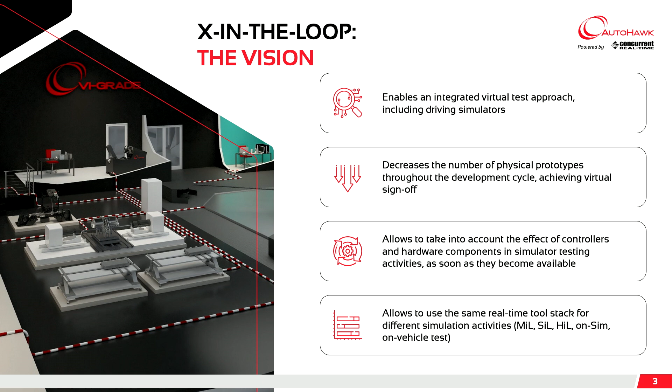To do that, what we adopt in the automotive world, and are now transferring to the motorcycle, is the AutoHawk. AutoHawk is a real-time platform based on hardware and software. On the hardware side and the control part, it is based on Concurrent Real-Time, our sister company. It consists of a real-time system with a huge set of I/O boards to enable communication with the real physical ECUs or emulation of some components, even sensors.

It's a Linux-based platform, and also a flexible platform open to third-party software and applications, and possible to link to third-party ecosystems. There are three main application areas in motorcycle development. One is the chassis. Everybody is familiar with VI-grade's VI-BikeRealTime as software for motorcycle dynamics on the chassis. In that case, on the hardware-in-the-loop side, we see applications on dampers, brakes and controllers.

Then ADAS and UX/UI: radars are becoming standard for high-level premium motorcycles, but also cameras. Some companies have already patented stereo cameras applied on motorcycles. Communication between vehicles, motorcycle to cars, for ADAS applications, and also HMI is an extremely important topic because it's the interface between the driver, the road, and the ADAS equipment.

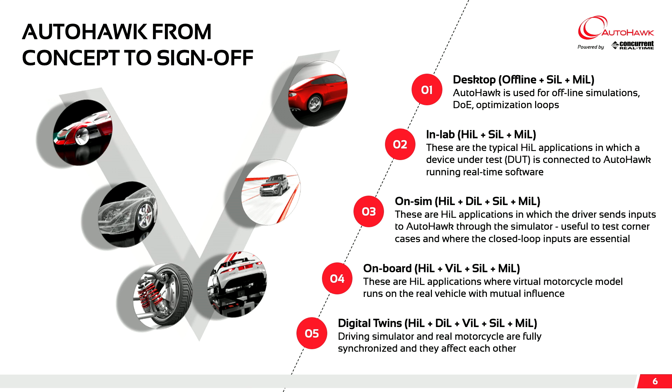And powertrain, with all its shades: traditional internal combustion engines, but also electric powertrains and battery electric vehicles. AutoHawk as a platform accompanies the customer along the complete V-cycle, starting from offline simulation, to real time, where only model in the loop or software in the loop are available, to in-lab with the HiL system integrated with the first prototype ECUs or open ECUs, where you can run the software on physical ECUs, connected with physical test rigs with physical components, controller-based or not, where you can put your controller in a Simulink model.

We started to think also about onboard solutions, as we did last year, and we launched last year the AutoHawk onboard for automotive application. There's also something ongoing for the onboard solution. And then finally the digital twin, where you have the complete digitalization of your vehicle, and you can perform a lot of tests in parallel with the physical prototype.

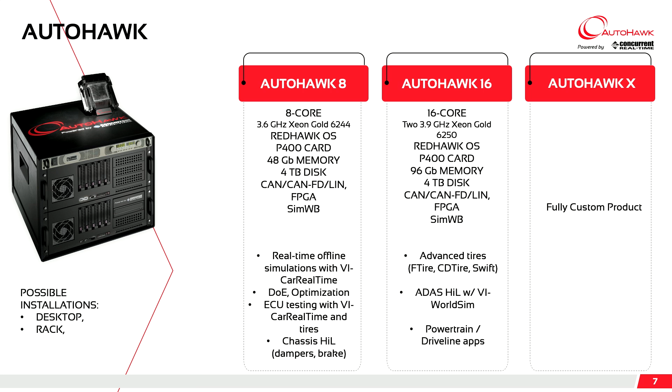The enabler, the hardware side: we have for motorcycle application 2 main standard configurations of real-time platform, an 8-core system and a 16-core system. For automotive application, we go up to 64 cores, but we think that, also to keep the investment low, the best compromise will be to play with those 2 systems, with the possibility to expand with the expansion chassis. If you have multiple I/O board requirements, the system comes already with several PCI Express slots available, but you can expand with the expansion chassis. And then AutoHawk X is a fully custom solution.

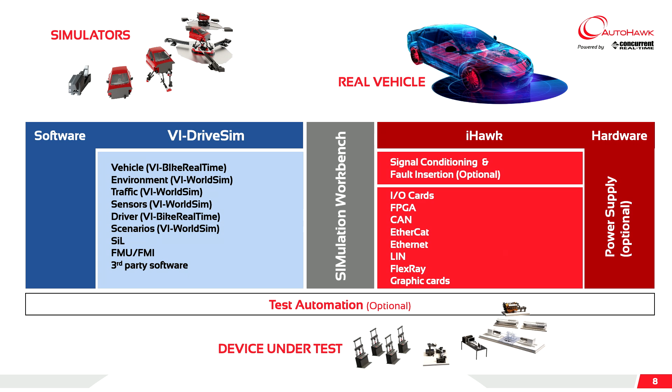The ecosystem is formed by hardware, the red part, where there is the real-time system and the I/O boards. The I/O boards are predefined I/O boards like CAN, CAN-FD, LIN, but there can be programmable I/O boards like a programmable FPGA, together with different types of protocols. We are working on automotive Ethernet as well, that will become standard in the motorcycle environment. Then the simulation workbench is a middle layer used to convey all the inputs and outputs during the simulation. And then the ecosystem of software from VI-grade with DriveSim for managing riding simulators and VI-BikeRealTime.

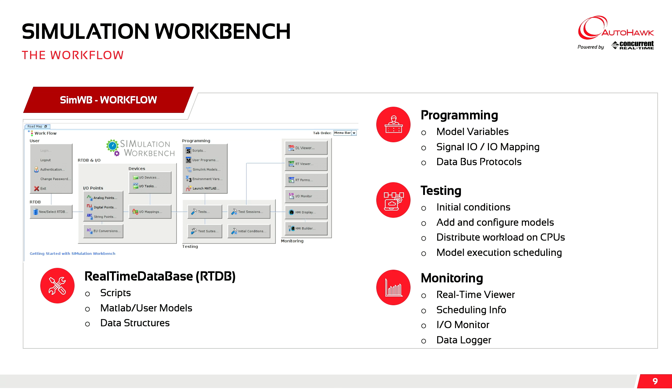Simulation workbench is a platform made by Concurrent real-time based on the AutoHawk hardware installed on the Linux system. You can manage the real-time database, the programming, the testing, and the monitoring during the execution of the test. This is the main connection point with external devices like dSPACE equipment, NI, Vector, and so on. The VI-grade ecosystem instead covers a larger variety of compatibility with third-party software, even third-party vehicle dynamics software or graphics. What is important is that all runs on the real-time system, and they are always compatible from the early beginning to the end.

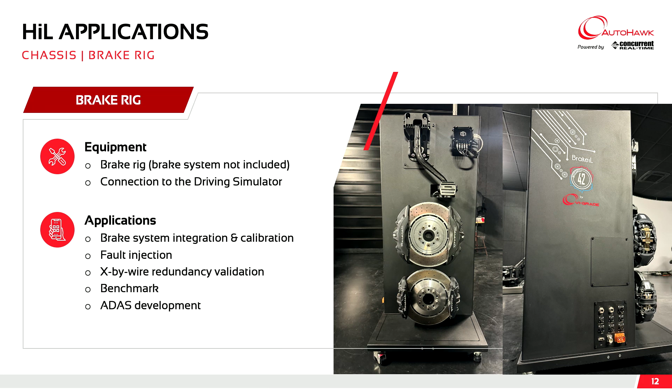Now, the theory is fine. Let's go to some practice, some use cases about what we consider hardware in the loop. For us, it's a control system or mechanical test rigs connected to driving simulators. From the chassis, we have brake rig systems that are controllable from a HiL station, a real-time simulation station, or from a riding simulator. The main applications are, of course, the analysis of the brake system. We are talking about full wet brake systems with the correct length of the system, the correct calipers, and the correct ECUs mounted and implementing the control system.

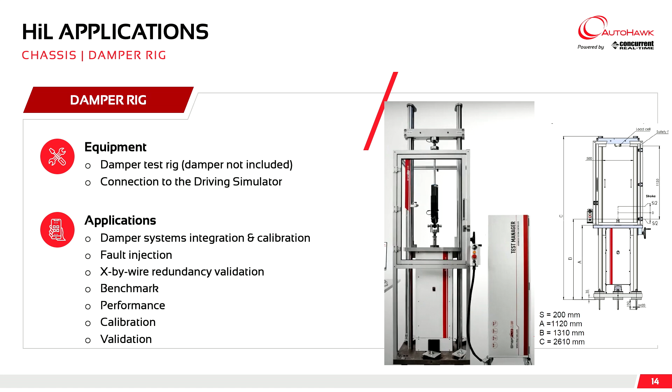They can be also brake by wire. If it's connected to a riding simulator, there can be also analysis of the driver feeling, the brake feedback. Connected also to the control units of the ADAS, there can be the interconnection of all those control systems. Damper rig: all these systems are derived from automotive application. There will be the possibility soon after lunch to see some of those demos in the demo area. I don't want to spoil more, but there will be the occasion to see some of them functioning in the afternoon.

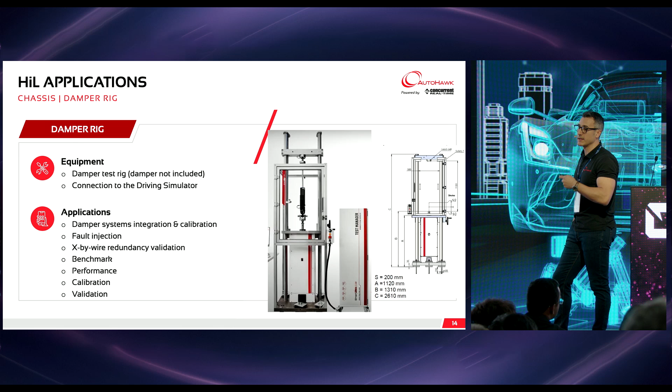The damper test rig has different specifications depending on the type of motorcycle and the applications. Here we see some in-depth specifications in terms of performance. We are doing real-time simulation and testing of those dampers in real application cases as well. It can be replayed applications or real-time driven applications connected to a riding simulator. For complex systems with several ECUs and physical components connected, here we see, for example, throttle bodies connected, ECUs, emulation of sensors, signal conditioning. All these are typical applications of pure hardware-in-the-loop systems. ADAS and HMI.

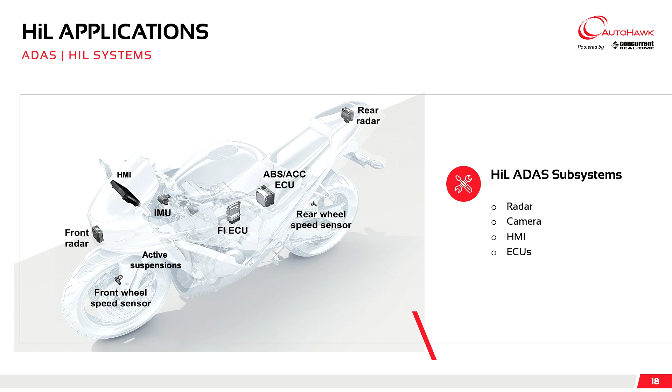Well, we know that ADAS systems are complex, and coming from automotive, it's interaction between different control systems, different sensors. Here I listed some of them. In ADAS, when you have a radar detecting, for example, a vehicle in front of you, you need to have an emergency brake system or the active cruise control. You will have the interaction between the sensor, the ECU of the sensor, and then the wheel speed sensor, the front and the rear, the suspension system, in most of the cases active suspension, the fuel injection ECUs, the IMU ECU, the ABS, and of course the ACC. And the HMI as well, because you need to send the signal feedback to the rider that something's happening on the motorcycle. So you have all these interactions.

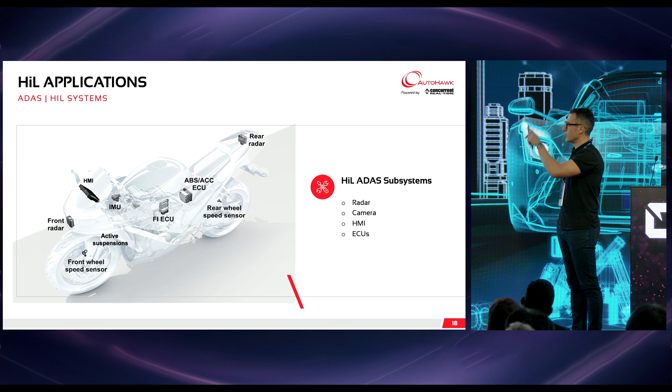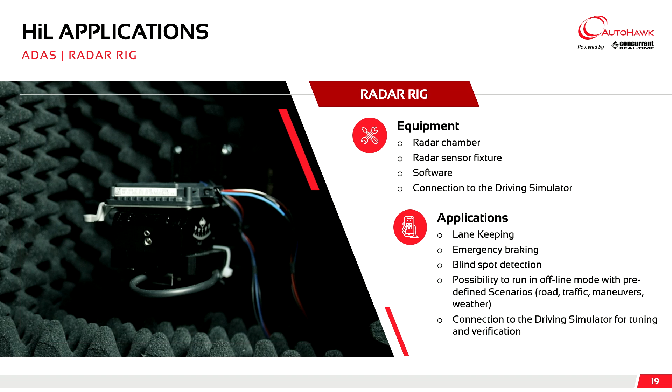How do we do it? You can test the physical components, or you can emulate the components by having a sensor model. In case of testing, we have the possibility, and you will see also a showcase here with the radar tester and the camera tester. So we have a radar rig and camera rig, able to make the sensor fusion between those two sensors, and together with the motorcycle model on BikeSim real time, evaluate the behavior response of the dynamics of the motorcycle and also the control system.

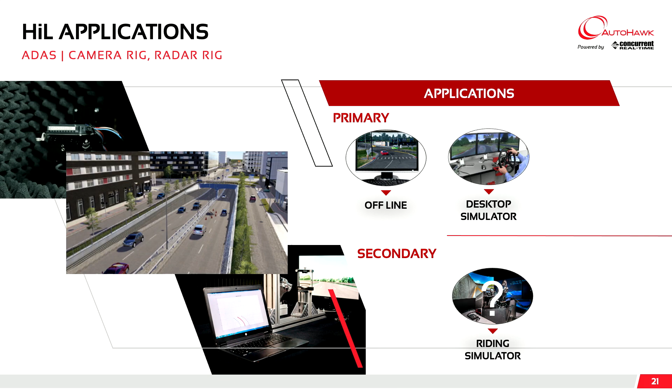The main application of ADAS coming from the automotive world is the primary application. You run offline simulation in real time because you want to train the ECU, you want to evaluate different use cases, different scenarios, strange scenarios that are most of the time also very dangerous to reproduce in the real world. With a simplified driving simulator, what we call a desktop simulator, and finally we're also connected to a riding simulator that Diego will talk to you about later.

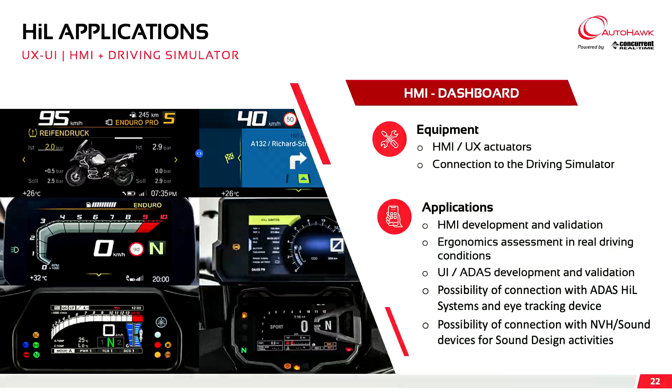HMI is another big topic of discussion nowadays: how to create a simple interface that can send back to the rider simple information about what is happening on the motorcycle. The HMIs, because of the new TFT design, technology and so on, are extremely crowded now. The same story as automotive, and now there is a trend of how this HMI design can evolve and go beyond just populating it with extra information, just popping up what is important to the rider.

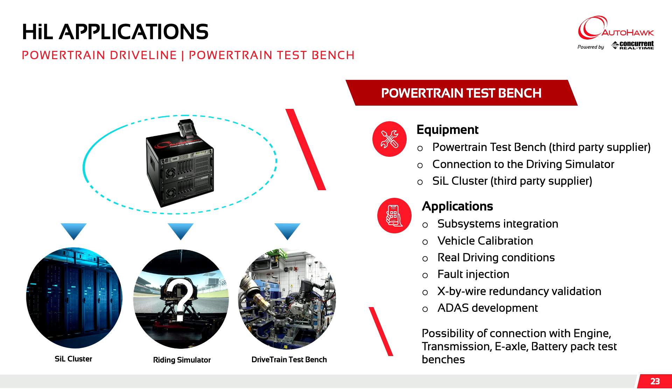Final results and example is a complex system where we don't have simple test rigs like a standalone damper, a standalone brake system, a standalone camera and radar, but we're talking about a powertrain test rig, where you have the complete engine, internal combustion engine or electric powertrain, connected to a rig. You can stress the powertrain by connecting this test rig to a real-time motorcycle model, connected to the control system, so a network of control systems with the HiL cabinets, connected to the software in the loop that can be developed, for example, on a software in the loop cluster.

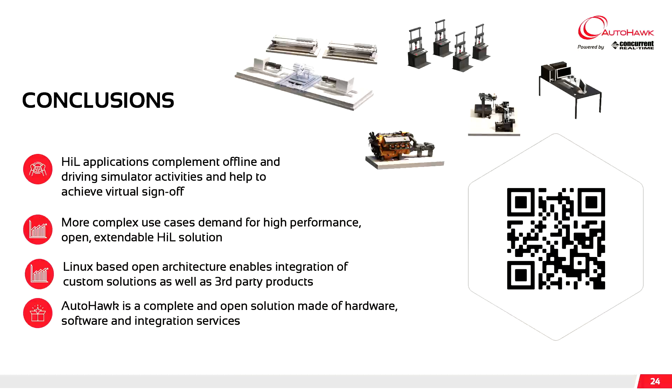Conclusions. So some of the applications I showed you here are real, are done already. Some of them are under development, coming from automotive. But what is important is all the hardware in the loop applications: since the early beginning, since the model in the loop mode, they are running in real time. This is the most important thing, that you never downscale the motorcycle model. You can only go up, never down. Okay, this is very important. And also the fact that these are complex systems. You can exchange anytime. You can move from model in the loop to software in the loop to hardware in the loop, and anytime you can exchange.

And there is also intercompatibility between departments. You know, the HMI department can derive the motorcycle model, take it as a given, and then work on the HMI. Then the HMI department can give the HMI development to the riding simulator guys, and they can see the feedback immediately while driving the vehicle, and then send it back to the HiL systems for the control system, and so on. So the last key message is that AutoHawk is an environment, a working environment, a platform, a real-time platform.